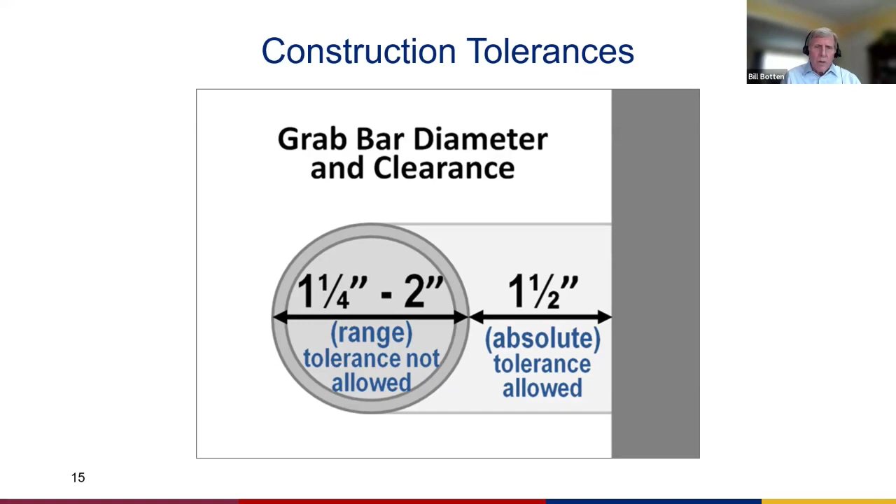And construction tolerances can be different for different types of manufacturing processes or different types of materials being used. I'm going to move on to slide number 16. Slide number 16 shows where there's this absolute. Let me just say that in the revision of the 1991 standard into the 2010 standard, there was a really great effort to try to reduce wherever there was absolute dimensions and make them all ranges.

And the reason for that is it's so much easier to construct, right? If you have a range, remember when there was an absolute dimension to the center line of a toilet? Well, plumbers didn't know what type of wall surface was going to be used, so it was always so hard. Now even that's a range, 16 to 18 from the sidewall.

What I'm showing you here on slide 16 is a construction tolerance slide continued, using the transfer shower. The transfer shower is an absolute 36 by 36, measured up from the floor about center line in both directions. So the back wall and the control wall both would be 36 inches.

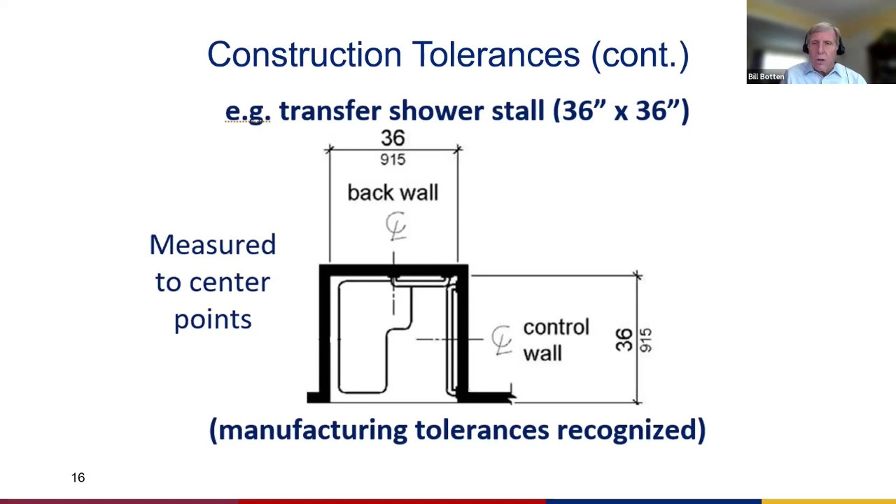Now, since those are absolute dimensions, not a range, manufacturing tolerances could be recognized. Some of those tolerances might include, like at the bottom of the shower, maybe it's a pan that rotates in or curves in on all four corners instead of being an abrupt corner all the way to the floor surface. So those manufacturing tolerances are permitted where absolutes are prescribed in the standard.

The next issue we're going to go to is, where don't you see a bottle filler anymore, or some type of water cooler in lieu of drinking fountains? I just want to state that neither of those, bottle fillers or this water cooler I'm showing here on slide 17, can be used in lieu of drinking fountains.

Once you start to provide drinking fountains, you have to provide two. Remember, the scoping is for the accessible unit for persons that are seated, and then one for standees. I'll show you a little bit more of that in upcoming slides, but once you've put in one drinking fountain, it requires two.

I think the thing I see most often is, like I'm showing you here, where a bottle filler is put at the back end of an accessible, seated fountain, for somebody using a mobility device to come up to and drink from the seated level, or for children.

With this idea where the bottle filler is at the back, remember that you cannot have an operable part beyond the knee and toe space provided. So 25 inches is the max it can be away from the front edge. I like to think of where my belly hits the front edge of that drinking fountain, to where I've got to try to fill that bottle, can't be greater than 25 inches, because no operable part can be beyond my toes greater than 25 inches.

So make sure you're not providing just a lowered unit and a bottle filler like the one I'm showing here. Remember, there's always got to be two in the same area, serving the same populations. It could be on the same floor, or in the same outdoor area. They don't necessarily have to be connected. It doesn't have to be one unit with a high and a low. It could be separate units, but they have to be in the same area, serving the same population of people.

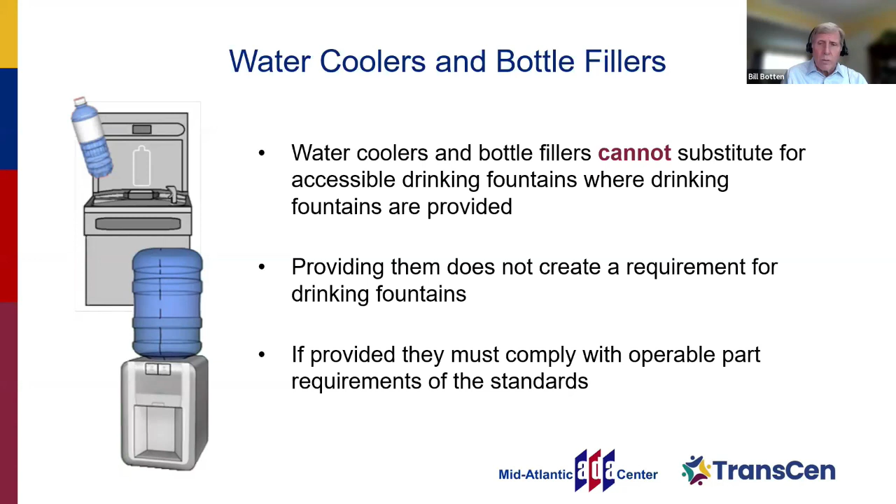So would a clear floor space. It could be parallel, but a clear floor space would be required, and the operable parts would need to be looked at. I'm moving a little further and going into drinking fountains as protruding objects on slide 18.

It's got two different graphics taken from guides right off the Access Board's website. It's showing an individual using a cane for wayfinding, tracking the wall, and coming across to where there's a drinking fountain in an alcove, but it still protrudes the maximum that it can, 4 inches.

So when we think of that projection coming off, a lot of times the lower drinking fountain, that projection cannot be into a circulation path greater than 4 inches, unless it's below 27 inches. But that drinking fountain needs to be mounted right at 27 minimum for wheelchair access, knee and toe clearance. So you really need to be right on with that.

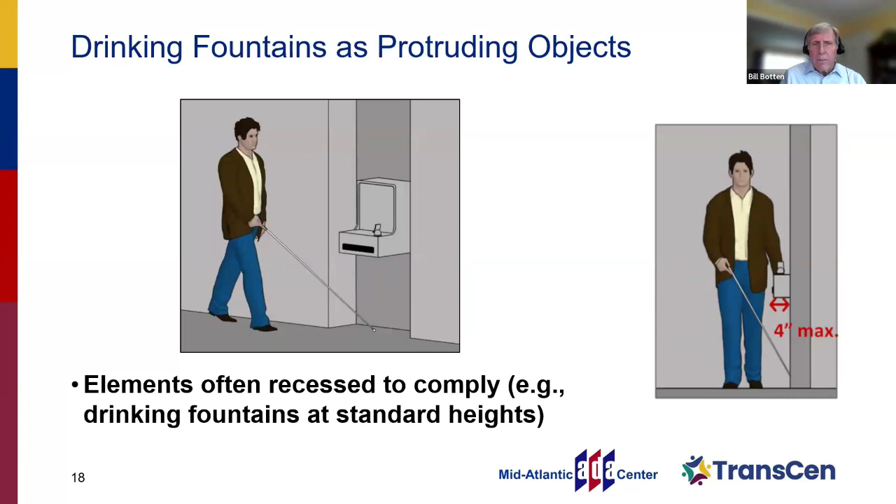I think the best way might be to put them in an alcove, or to make sure that they're not within the circulation path, which is always what's required. No matter what you have in this alcove, it still cannot protrude greater than 4 inches into a circulation path. And the wheelchair accessible unit has a 27-inch high absolute, and can enclose on one side of the high units.

So that could be the alcove created by that lowered unit. I'm showing that in the lower graphic here on slide 19, where the common direction of travel would be to stay to your right, so you're tracking the hallway along the right-hand side. The first object you come to is at 27 inches. Protruding objects in chapter 3 permit an object to be at 27 inches and still be cane detectable, but it's an absolute.

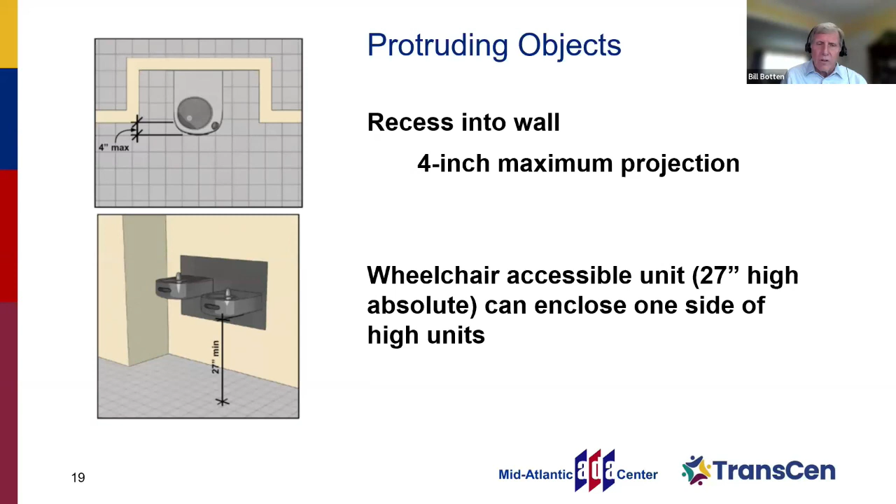I'm showing myself in slide 20 on the far right, at a recreation facility that uses a low unit, a high unit, and a bottle filler all in one. The clear floor space is being shown outside and away from that high unit.

Nancy, you want to stop me right here for a second? I do. We had a question that's perfect right here, I think.

The question is about drinking fountains located in an alcove. If it's located in an alcove and wouldn't be considered a protruding object, does that mean the knee clearance could be higher than 27 inches? It could exceed that 27 inches. I believe the standard does require that as an absolute, but I'll have to come back to you on that, or we can look it up as we go. 27 inches would be the lowest possible height for knee and toe clearance, but I believe you might be able to have it higher than that in an alcove. I actually sit a little higher than 27 at my knees and appreciate that additional height. We'll talk a bit more about that with dining and work surfaces. But I need to go look at the actual standard, or maybe you can, Nancy, and make sure that's not an absolute there in that chapter. I'll do that. Sounds great, I'll move forward.

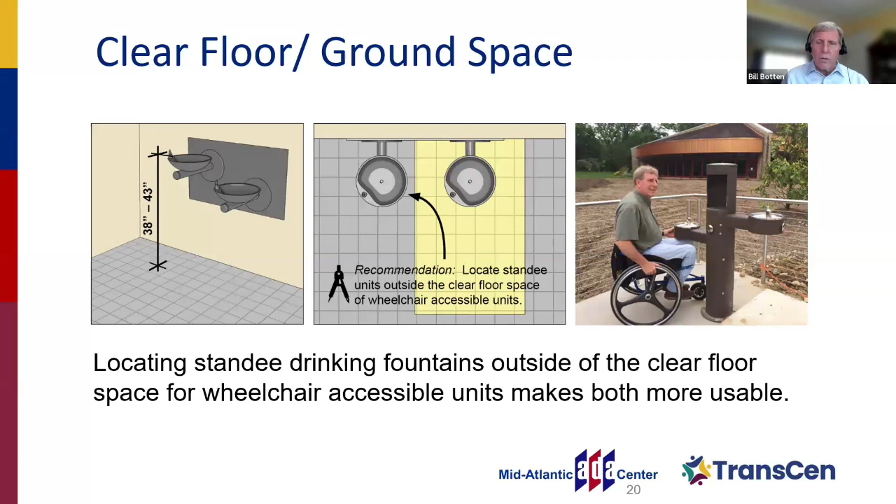I've also seen in recreation facilities where when you have this unit that has not only a high and low unit, but also a bottle filler, sometimes they have a dog bowl at the very bottom. Make sure the operable parts for that dog bowl are available within the reach ranges, no lower than 15 inches, and that it's not placed in the clear floor space for the mobility accessible lower drinking fountain.

So I just wanted to throw this in because when we talk about things that are mixed up or misused, we're really talking about an individual's independence. These minimum requirements are there to try to increase persons with disabilities' independence, their ability to do things on their own, not have to ask for help, in a safe manner. There's nothing more important than when developing an area or facility designed for children's use, that you use the dimensions for water closets, drinking fountains, grab bars, play tables and things like that, which honestly make it more independently usable for this younger population.

So I wanted to show that there is this opportunity, if it is for children, for a parallel approach to the drinking fountain with a spout at 30 inches maximum above the finished floor, and that spout 3.5 inches maximum from the front edge of the unit, including any bumpers, which makes it more independent for somebody sitting a lot lower trying to get to this in a parallel approach.

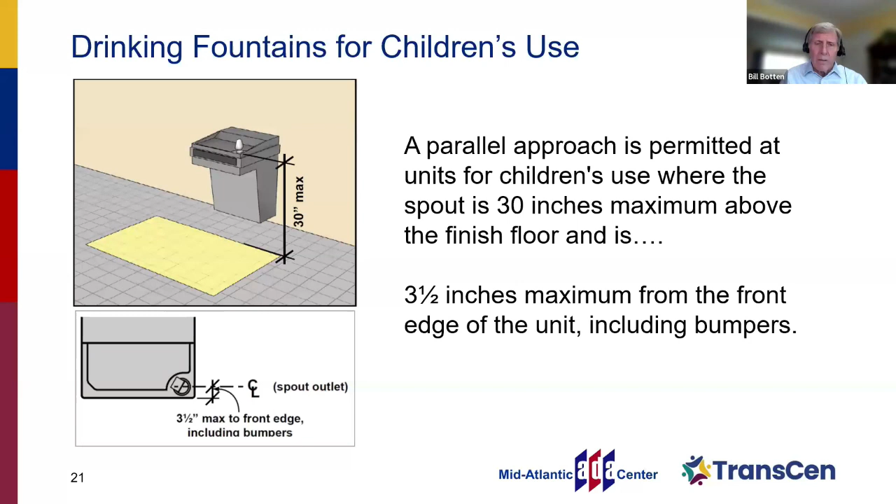I oftentimes think too - well, I have to sit parallel at a lot of different sinks, and I love the sinks that have the pull-down or gooseneck feature where you can bring it to yourself, because I can really get to both hands very well if I have that opportunity. In this one here, sometimes it can be very challenging to lean that far off to the side to get to a drinking fountain. So sometimes cups or a bottle filler make it more independently usable for some.

I looked in the standards and found this interesting: for knee clearance in the text, it's not really expressed as a minimum or a maximum. It's expressed as the space that can be considered knee clearance, between 9 and 27 inches.

The illustration shows the 27 inches as a minimum for knee clearance. That brings you back to 306, doesn't it? That's exactly what I'm looking at. Yeah, 306, and that's the way it says it in text: space under an element between 9 inches and 27 inches above the finished floor or ground shall be considered knee clearance.

So I think that suggests, and then the image sort of supports the idea, that it can be more, depending probably on the limitations of the top. For example, a drinking fountain with the spout location, or if it's another type of surface that requires knee clearance, there's going to be some sort of counter surface or something. So I think that's kind of interesting the way that's worded.

And if you'd like, before we move on, we did have a question I'm not sure you can answer, about the tolerances in the example of the transfer shower. Do you have any notion of how much tolerance is permissible?

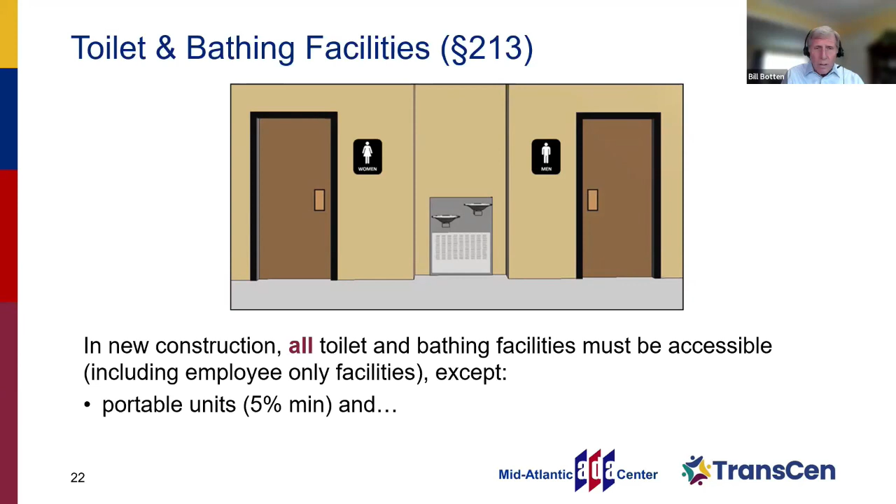We're going to go into a little bit more of that. And remember, that unisex toilet room or family room, whatever you want to call it, cannot substitute for access in provided multi-user toilet rooms. So if you're providing multi-user toilet rooms in new construction, it doesn't limit your obligation for accessibility in those just because you provide an accessible family restroom.

There is this idea, though, that if it's in an alteration and you can't make those existing toilet rooms accessible, you could do a unisex or family restroom, and that would be okay. But in new construction, no—that unisex restroom cannot substitute for access into multi-user rooms.

And that was an issue that we heard of regularly, as well as this clustered single toilet rooms exception. Remember, that is only for clustered toilet rooms and not clustered bathing rooms. That's a really big one.

If you provided individual bathing rooms, maybe with a transfer shower or shower, toilet, and sink, and there were multiple ones in the same location, it would require 100% of those to be accessible. Whereas if it was just a toilet room with a toilet and sink, meeting the requirements for toilet rooms, it would be 50% of those clustered in one location that serve the same users. So the idea here is it's serving the same population of people, but it's all in one location.

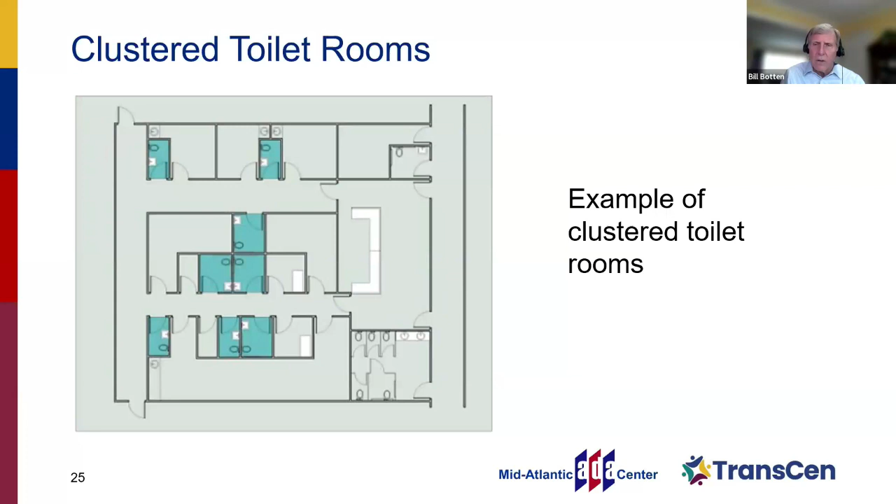The single toilet room cluster exception permits that only 50% of those would need to be accessible. The other exception under 213 is portable toilet and bathing. Here, if you have portable bathing and portable toilets, it's 5% of the toilet or bathing units at each cluster, where you're clustering these together, no less than one.

In slide number 26, I'm showing a graphic where it shows a ramp up to the clear floor space. Do not put these in the grass. Don't put them up on the curb if they're the accessible one. Try to provide more than the 5% because everybody wants to use these, right?

These are the larger ones. If you're going in with a kid, you're going in with a spouse that needs help, you're going in with somebody that's got a service animal or a mobility device, everybody wants the accessible one. I suggest you provide additional above this minimum requirement to facilitate greater access and independence by everybody.

It's showing it ramped up here, but remember at the door surface it would need to have a clear floor space and that door maneuvering clearance. You're seeing that the door maneuvering clearance is provided with that offset on the pull side.

Make sure that the portable toilets you're providing are single toilet rooms, right? They'd have to have the 5-foot turning circle in there. You need to make sure that the grab bars are in the right position, that the center line of the water closet is provided, and that your toilet paper dispensers and grab bars are all in the right locations.

Now, I've seen many where you don't have the clear floor space for the mobility device to sit exactly right next to the toilet or water closet, and some of those honestly make it a little bit easier for me. They're non-compliant in that, remember, you need to have that 30-inch clear floor space adjacent to the side of that water closet. But to me, that little bit of extra space is really helpful to get onto that before I get onto the toilet or back into my wheelchair. It can provide greater access, I think.

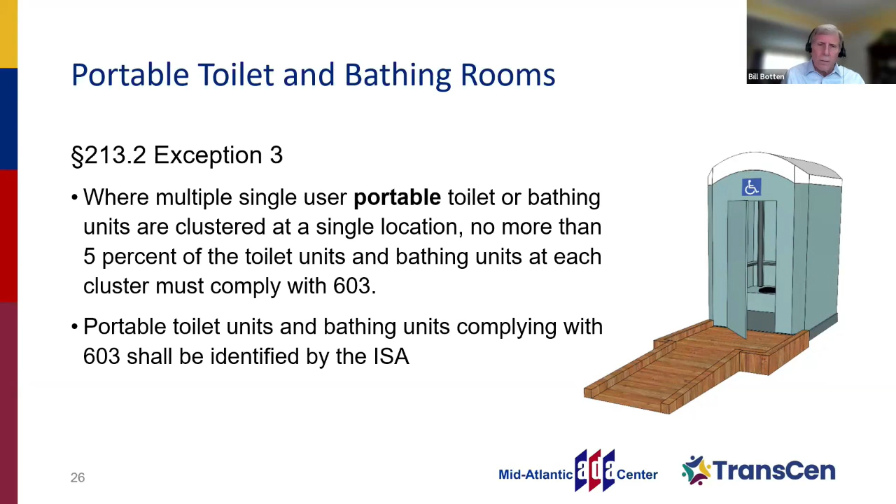Going forward with still toilet and bathing, I think one of the things we see more often now is this toilet compartment that has floor to ceiling partitions or doors, or just a little bit under the door. People want additional privacy, or sometimes we even see these now in a unisex multi-user toilet room where they have individual water closets in these larger stalls that are full partitions. Or we see individual toilet rooms that are along a corridor or hallway.

So that's the distinction I want you to make: toilet compartments are stalls that are in a multi-user room, whereas toilet rooms would be off of a corridor or hallway, with individual entrance doors off that common corridor instead of off a central room. So those two are treated very differently, right? One of the issues with stalls, and I'm on slide number 28, is that it requires toe clearance.

One thing people don't often remember is that once you're in the stall, the ability to maneuver depends on getting your toes underneath those partitions to increase the size of it. So toe clearance is required per Chapter 6.

On slide 28, I'm showing an elevation for an adult, an elevation for children, and a plan view showing the minimum 6-inch clearance around one side and the front. The children's elevation requires a minimum of 6 inches beyond the partition on the outside, at 12 inches minimum from the floor surface. The adult partition requires that same minimum 6 inches beyond the partition outside the stall, at a height of 9 inches minimum for toe clearance.

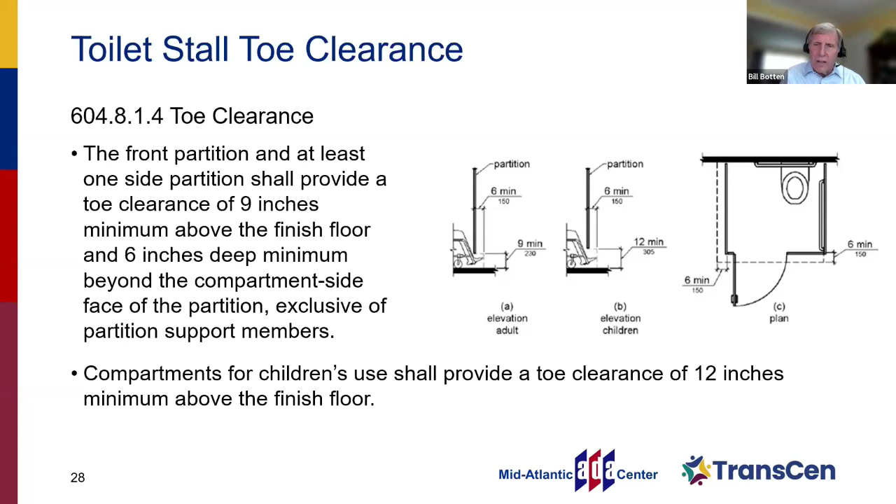So what happens then? There's an exception in 604.8.1.4 that says toe clearance at the front partition is not required in compartments that are greater in size. So we incorporate that toe space into the size of the compartment. Basically, if you can't provide that additional toe space along one side wall and one front wall, the size of the stall just gets larger.

Greater than 62 inches deep with a wall-hung water closet, or 65 inches deep with a floor mounted water closet. Why would it be bigger with a floor mounted one? Because you can't get your toes underneath it like a wall mounted one, reduced usability, reduced toe clearance underneath. So toe clearance at the side partition is not required in a compartment that's greater than 66 inches wide.

Nancy: We've had a question here related to the partition supports. How wide can a support be when it restricts toe space? That's a good one.

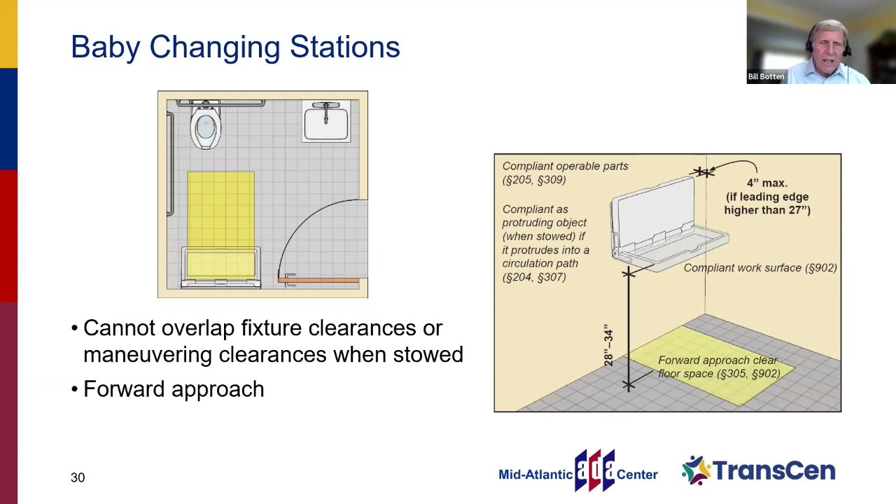I have not seen where building standards are trying to bring in this overhead lift yet, but the adult changing table is coming in the ANSI document, and will be coming forward in large assembly areas - this requirement to provide an opportunity for adults to have a changing table in certain occupancies.

And the idea here was that this surface - I've seen them both where they move up and down, and also where they are fixed at a transfer height between 16 and 18 inches. So I've seen them both ways. I think the electric or adjustable height might provide more independence and usability by a wider audience.

Remember, you're looking for clear floor space, operable parts if they do operate. This one had a lot of instructions on the wall about how to operate it. It also had a removable pad that could be taken on or off - quite a setup they had there at the airport. But in your model building code, the requirement for these in certain facilities, occupancies, and assembly areas will be looking to start to provide these adult changing stations or tables.

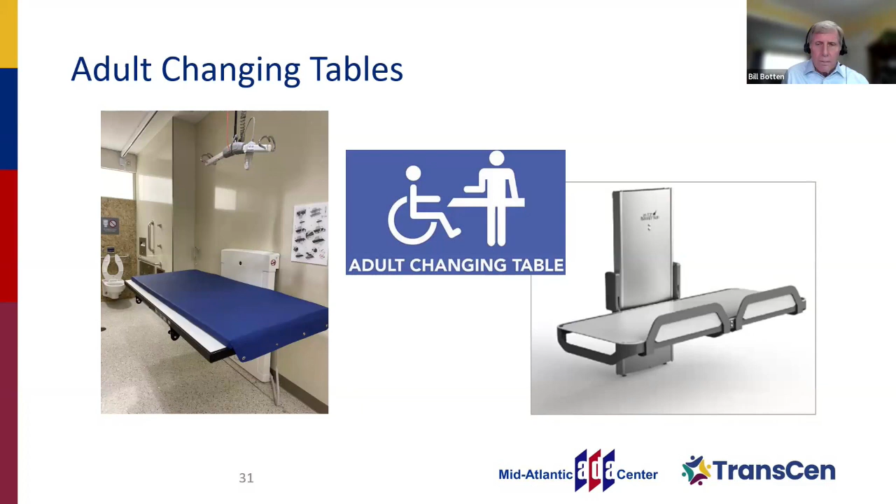Nancy's back - what do you say? 902 gets you knee and toe. Yes, it does - it gets you all the way to 17 inches toe clearance. So it does, yes. A baby changing table is definitely a work surface, right? It is. You're working on that.

Yep, so there it is. Compliant work surface at 902 would get you back to 306, which would get you full knee and toe clearance, which would be a minimum of 17 inches underneath the element.

So good catch, good question. Good questions. We got some stumpers with us today.

Transient lodging guest room scoping was one of the other issues we wanted to bring up today, and that guest room with mobility features. First, remember, it's your choice, but you've got to pick one. And oftentimes it might not be your choice, but it's going to be a transfer shower, an accessible tub, a roll-in shower, or the alternate roll-in shower.

And I have my bias. I'm a paraplegic, and I really prefer either the transfer or roll-in, or a tub with the permanent seat, not a removable bench. Too hard to transfer for me.

Remember that the idea on the scoping would be that they're dispersed among the many classes of guest rooms that are available to everybody else. So if it's two twins, a king, a beach view, a balcony, whatever we've got going on, we're still looking to make sure that individuals with disabilities have that same opportunity, whether it's the type of beds, the amount of amenities, or the type of room being provided.

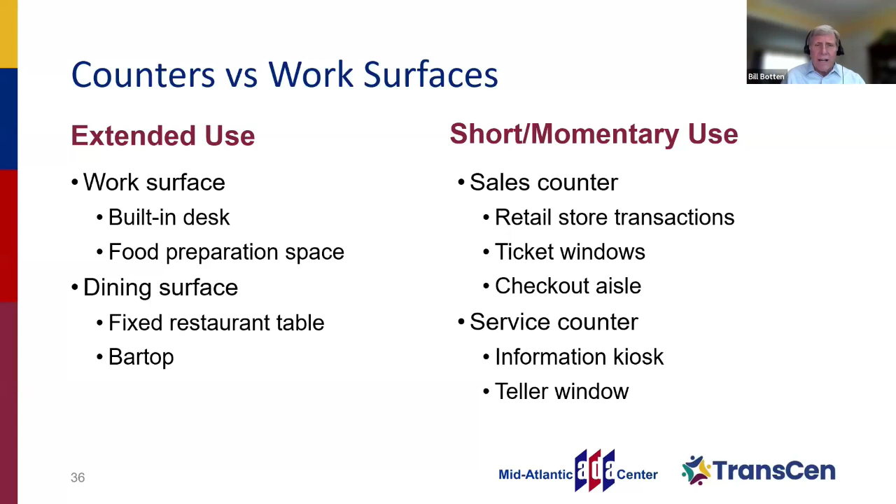And so we thought we'd clarify a little bit of it. Here we should have probably gone to this slide after we talked about baby changing stations, because that work surface height is 34 inches to the top of the surface, but does require full knee and toe space on any work surface or accessible dining surface.

For a service counter, it's your choice. You can provide either a parallel approach with a 36-inch high maximum counter height, or you can provide a forward approach with knee and toe space, again at 36 inches.

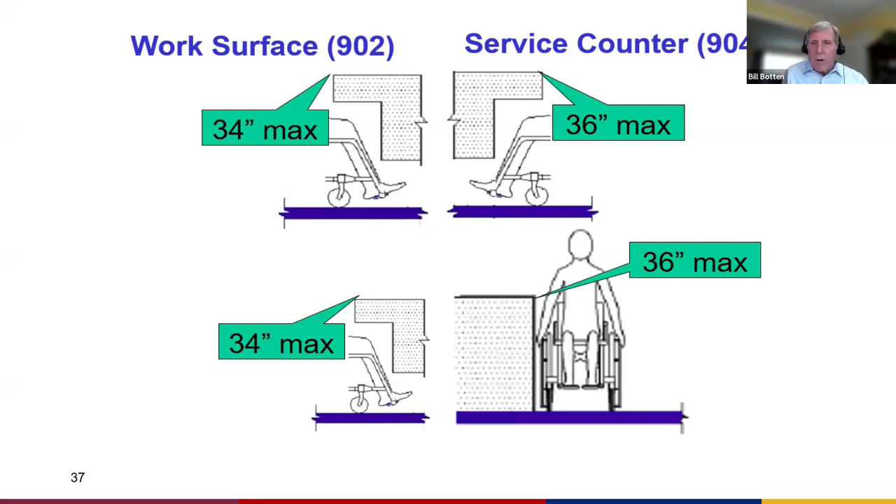So your work surface height max, your dining surface height max is both at 34, but your sales or service counter max is 36 inches from the finished floor, providing either a parallel or forward approach. Slide number 38 goes into that work surface.

Remember, under the Americans with Disabilities Act, the scoping applies to work surfaces for public use or common use. Okay, so we're thinking things like a library, a school, excluding that use by employees. That provision is found in the scoping requirement. So accommodation for employees with disabilities is required under the ADA under Title I, and so it'd be a job accommodation.

But we're talking about work surfaces maybe at the airport, maybe in a terminal, that are there for public or common use. We already talked about that the top of that work surface is 34 inches, and it does require knee and toe space. And so I have a slide that brings a little bit up that.

The scoping requirement in 226, Chapter 2, access to at least 5% of the surfaces. At least 5% applies to both standing and seated surfaces, and dispersion within the space or facility is required.

I want to highlight one thing, and I put the provision in here, and it says where dining surfaces are provided for the consumption of food or drink, at least 5% of the seating spaces and standing spaces at the dining surfaces shall comply with the 902 requirements. It doesn't say of each type. It just says 5%.

Now, that 'of each type' sometimes can be that clarification. Here we're saying standing and seated spaces, but we're saying that that is really the only typing we're talking about. We're not saying inside and outside spaces, though I would suggest that dispersion requirement would make it so that you facilitate access in as many of those areas that everyone else has that same opportunity.

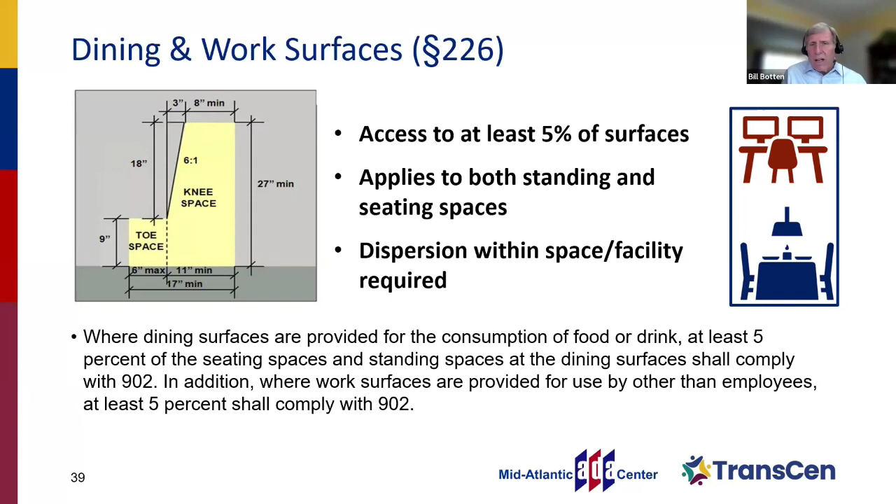In slide 39, I'm also showing a graphic on the upper left that shows that minimum knee and toe space. It's showing that at that 27 inches minimum, we have 8 inches of knee clearance. This is a graphic directly straight out of the U.S. Access Board's materials, and on the right-hand side, I'm showing you a graphic of just a dining surface and a work surface.

If you had all three of those counters, an order, a pickup, a drop-off counter, all three would need to be accessible. Remember, it's one of each type. Other types of sales service counters, display, exhibit counters, are covered only if they function as a sales and service counter. So you could have a display counter, but if it doesn't serve as a sales or service counter too, it doesn't need to meet these minimum requirements.

So the scoping is at least one of each type of counter, each type of function at the counter, and dispersion among the types of counters provided. I put a resource there, an animation that U.S. Access Board staff created on these sales and service counters, and it's a great one. I honestly think the best way to see provisions and understand them is to see how they impact usability, to see how somebody really uses things.

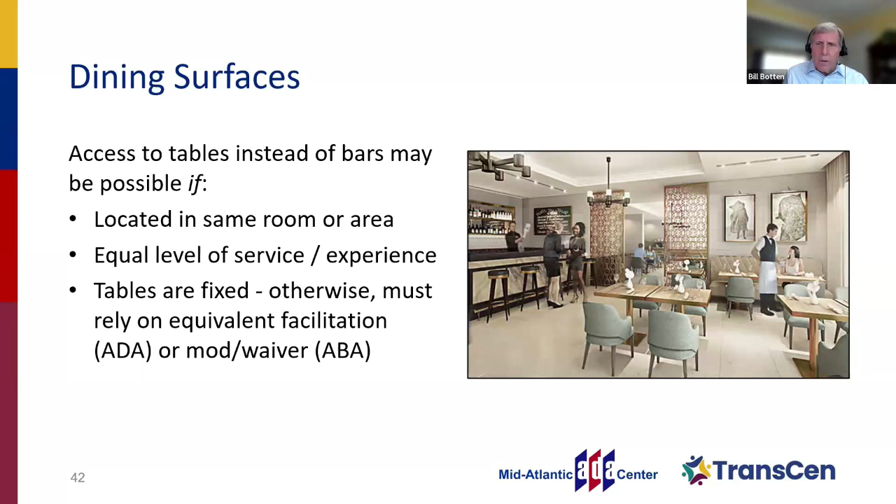They have what's called a modification and waiver, not equivalent facilitation. Remember, 5% of the seated spaces would be required to be accessible. In the graphic on slide 42, there are non-fixed tables and a bar counter. If the only fixed dining surface in this facility was the bar, that would need to provide an accessible dining surface. But if they had fixed dining tables in the same area, same level of service, same experience, located in the same room, you could get away without providing a lowered area at the bar.

Think about the location of where things are. These portable toilets are put on the hard surface—don't put them up in the grass. Make sure everybody has access to them. If there's a lip greater than a half inch to get in, you need to ramp it. And remember, there has to be a level landing at the door for maneuvering space, which is why I showed that earlier picture.

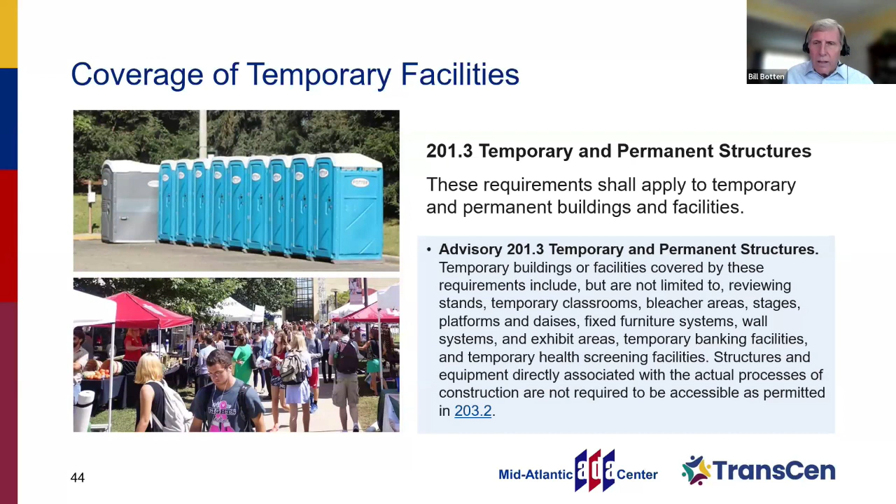Benches are one of those questions we get all the time—whether a bench out on the pier at the lake or a bench in your courtyard or atrium needs to comply with the requirements for dressing, fitting, and locker room benches. Often we say if there's not a specific requirement for the element, standard, facility, or space you're providing, you look to the standards for guidance. But this is a really different type of bench.

This bench is designed for somebody to roll around on and get dressed. Providing a dressing bench out in the built environment in other areas where it's not for dressing is typically not appropriate. I'd recommend that the requirements for the dressing, fitting, or locker room bench are not what you should look for when providing a bench in an atrium or along a trail, shared use path, or similar area.

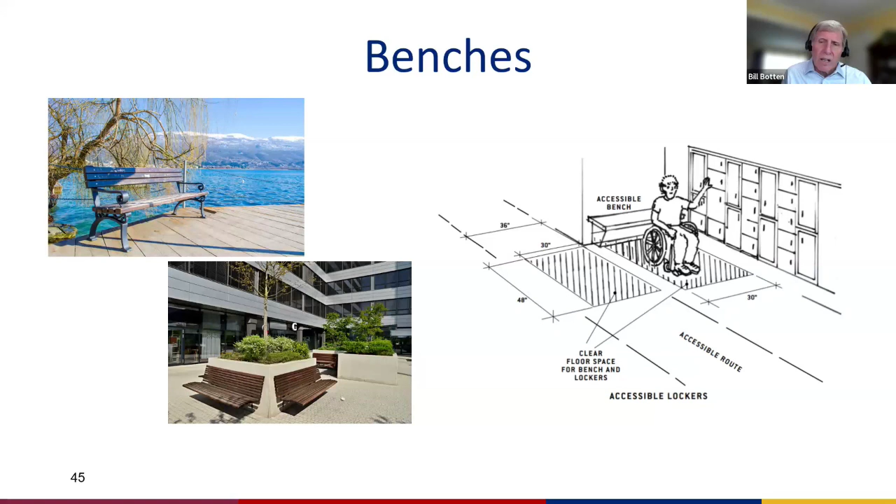Shopping or shipping lockers - I had this frustration recently where I couldn't reach the locker they put my stuff in, and I had to get staff to help. So I thought I'd throw this in and talk about how they would be required to be on an accessible route, that a percentage of them, at least one of each size type, would need to provide an operable part and be accessible. It's so important that the opportunity to get your materials sent to one of these places, or pick up, that they provide a level of access. So consider those when you're looking at any type of survey or facility inspection you're doing.

When you're doing handrails on ramps or stairs, there's not a minimum distance from the sidewall. These can be freestanding and be quite a ways away from things. There's not that thought that you're going to get trapped by going behind something.

But it does require extensions, and you see them highlighted here. I'm going to go into further detail, but they're 12 inches minimum long in the same direction of travel, required at the top and bottom. I can't tell you how many times I've seen where the landing starts too soon or too late, and you can't get this, or they try to wrap the handrail around the corner and don't put it in the same direction. It needs to be level and in the same direction.

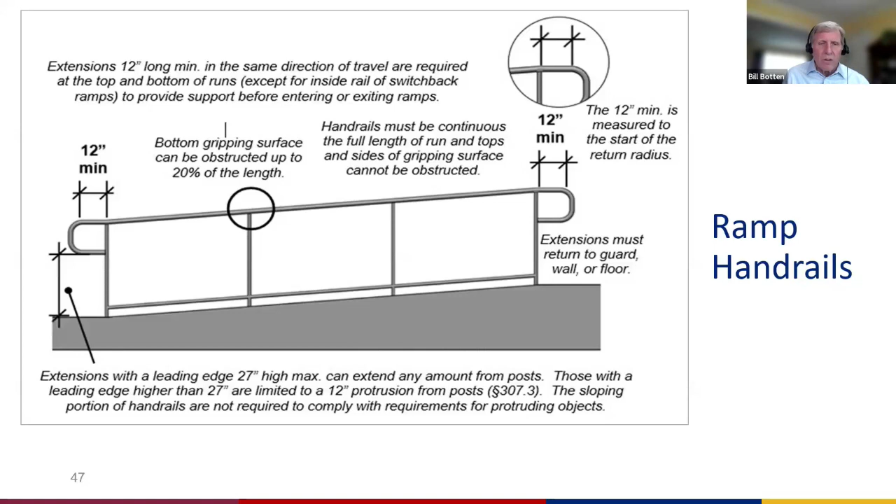Sloped bottom extensions: one tread depth minimum beyond the last riser nosing, in the same direction of the stair flight. And that can be kind of confusing, right? In stairs, you want to continue beyond one tread width in the same downward or upward slope, but at the top, you go horizontal.

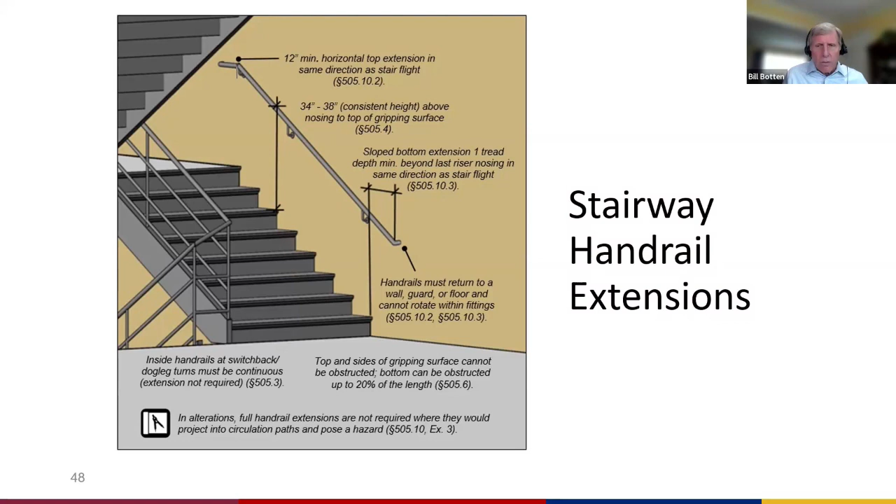That top handrail extension, again we already talked about, but it's 12 inches horizontally above the landing, beginning directly above the first riser nosing. Remember, measured to the start of that turn, 12 inches minimum, must be horizontal at the top.

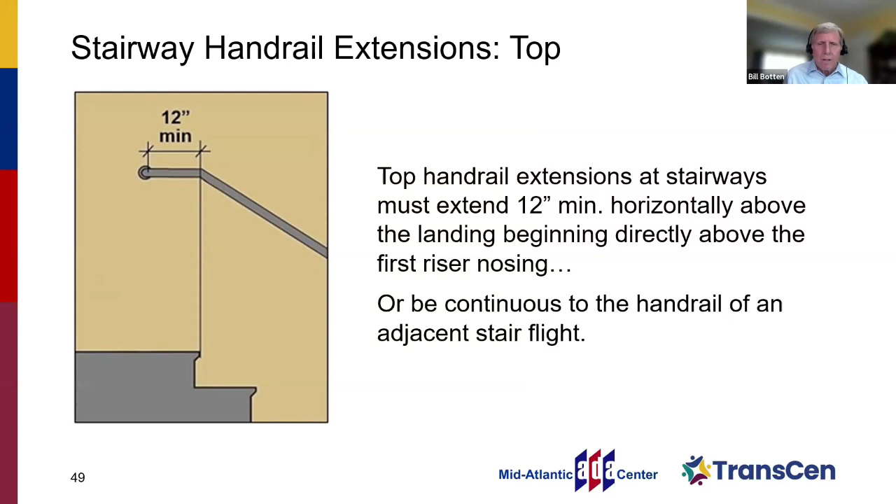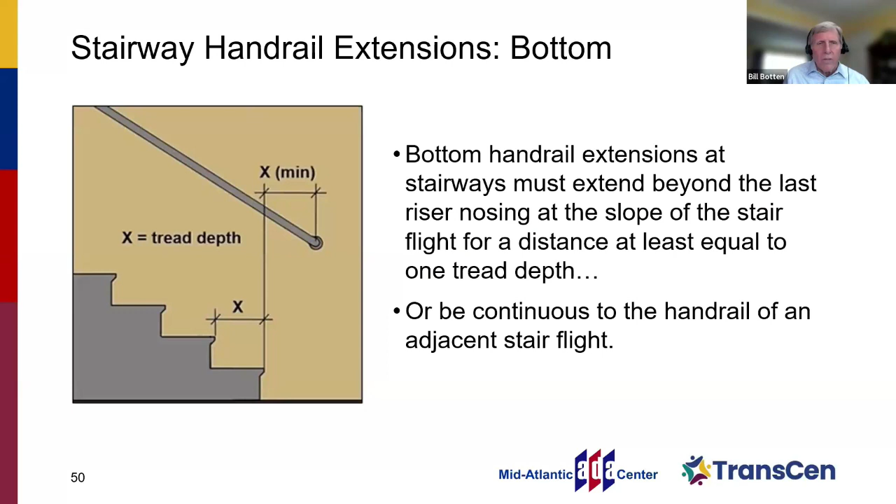Slide number 50 shows that bottom extension again in the same direction, 1 tread width minimum, okay, but it's beyond the last nosing in the slope of the stairway flight for a distance equal to 1 tread depth.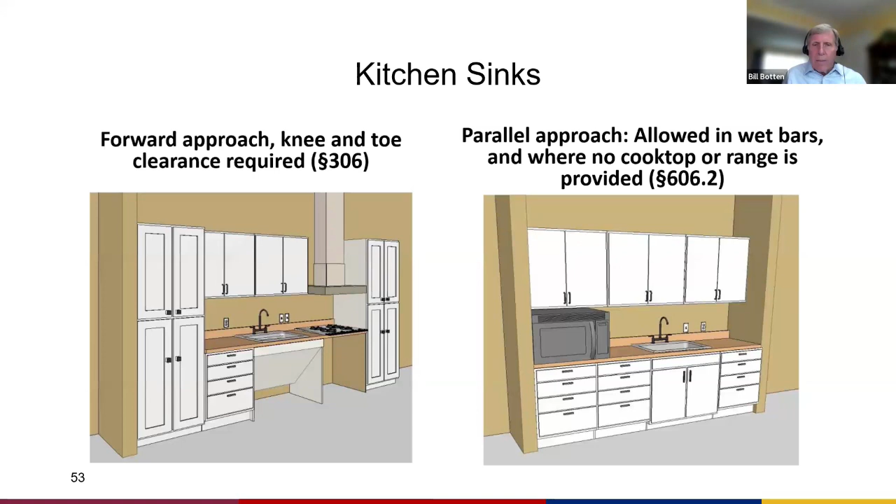So the question always comes up: when do I have to have knee and toe space underneath the sink in a kitchenette or a kitchen? Forward approach is required at the knee and toe, but if you have a wet bar or where no cooktop or conventional range is provided, in 606.2, it says that you can provide a parallel approach. Now, some state codes I've seen say that if you're providing a microwave, you still have to provide that knee and toe space. But currently, the federal standard says if there's a wet bar or where there's no cooktop or conventional range, you can provide a parallel approach at a kitchenette sink.

Each separate movie theater would provide this opportunity. There's an exception where no audio amplification is provided. Courtrooms don't get that exception; all courtrooms would have to provide assistive listening. It's not triggered by the occupancy load or fixed seating. Remember, it's only triggered if you're using a microphone, and signs indicating the availability of these need to be provided when they are. There's lots of ways to provide this, and they're becoming more and more independently usable through broadcast or Wi-Fi, infrared, FM radio, or an induction loop are 3 of the common ways that these are provided.

On slide number 56, we talk about the receivers. In the late 90s, I was working for a large assembly seating facility management organization, and at that time the old standard said 4% of the seats in your seating area was the trigger or scoping requirement for how many receivers. We were trying to, for a 20,000 seat facility, we had 800 of these receivers. We would barely check out 2 or 3 at a time. The 2010 ADA standards reduced that, the minimum number of receivers required per assembly based on that seating.

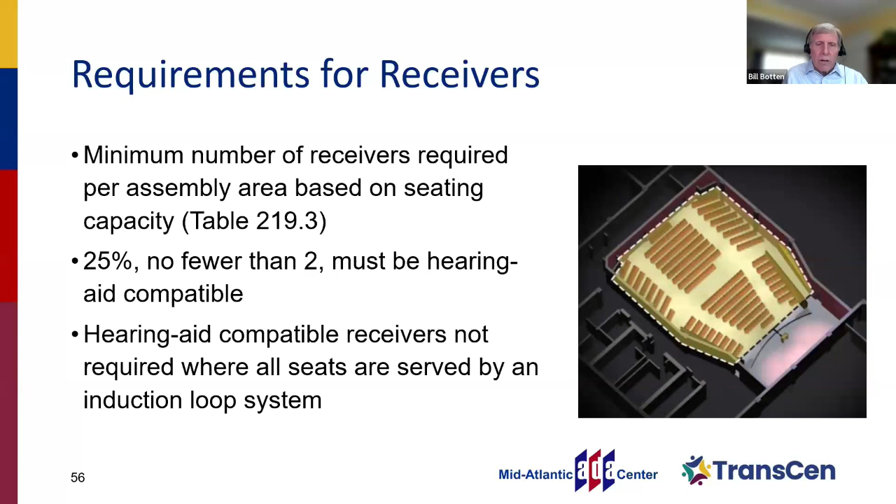Moving on to slide number 59, it shows a graphic of two vehicles parked in a parking area, and each of them has an opportunity to charge their vehicle, one in a head-on position and one in a rear-facing position.

Requirements for operable parts: clear floor or ground space at that element, connected to the accessible route. The requirements for Section 508, whether audible or visual, those opportunities typically only apply to the federal government at this time.

I think most manufacturers will create these so that they don't have to create two versions, providing accessible options on the display screen, the input controls, keys and cards, and how you use them, along with the automatic fare or fare machine requirements.

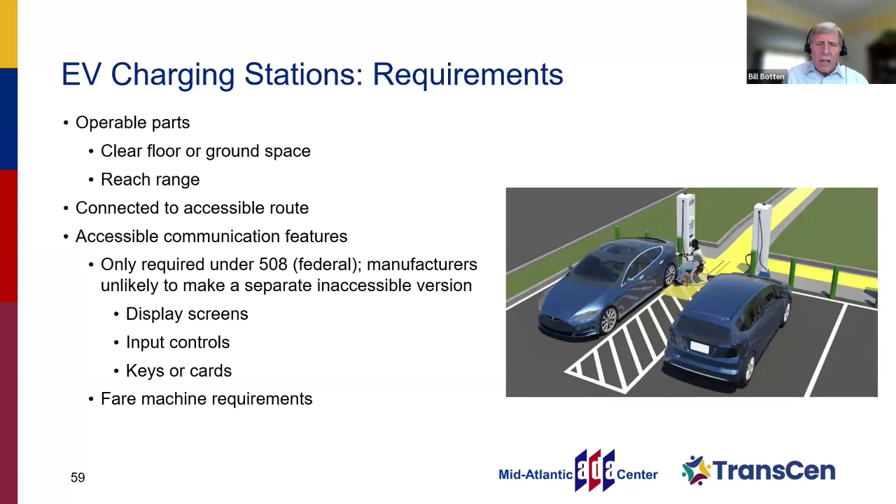This should be looked at. Don't allow these to continue being put in where you can't reach them, where they're outside your reach range. I'm showing you a picture of myself on slide number 60, where I can't even reach the element.

The real challenge with a lot of these vehicles is we don't know where they're charging. Some charge right in the front, some on the right quarter panel, some in the rear quarter panel. That's what makes it challenging—people need to be able to back in or head in and get to these, using that accessible route access aisle to reach the unit itself.

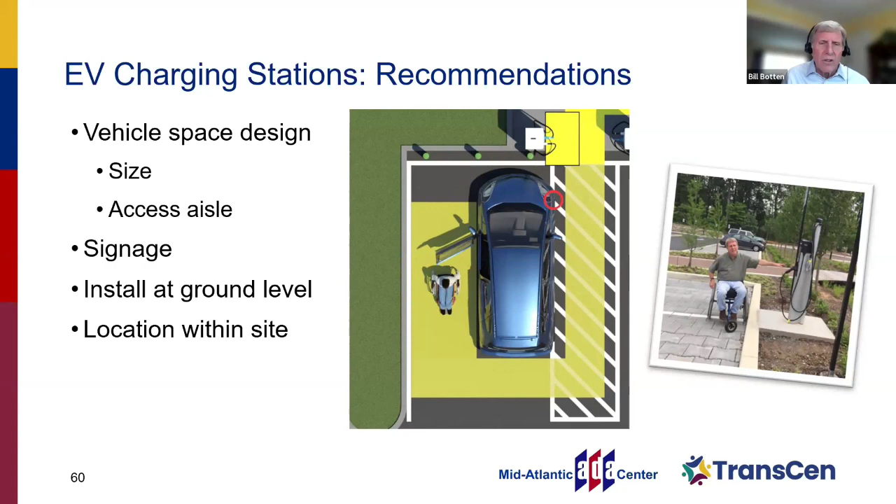So make sure the vehicle space has the right size, an access aisle, and some signage. The guidance document doesn't provide any scoping for how many are needed—it just talks about what space is needed and how to install at ground level at the site. On slide number 61, I moved to what I call facility types.

I think there's always a lot of confusion on whether you're creating an accessible route connecting elements on a site, even within a play area or recreation facility. If it's a pedestrian access route, is it a sidewalk, a crosswalk, a shared use path for hikers and bikers, or just a pedestrian trail? Understanding the facility type you're creating gets you to the requirements for that route—so know what you're creating before you apply route requirements to a specific facility.

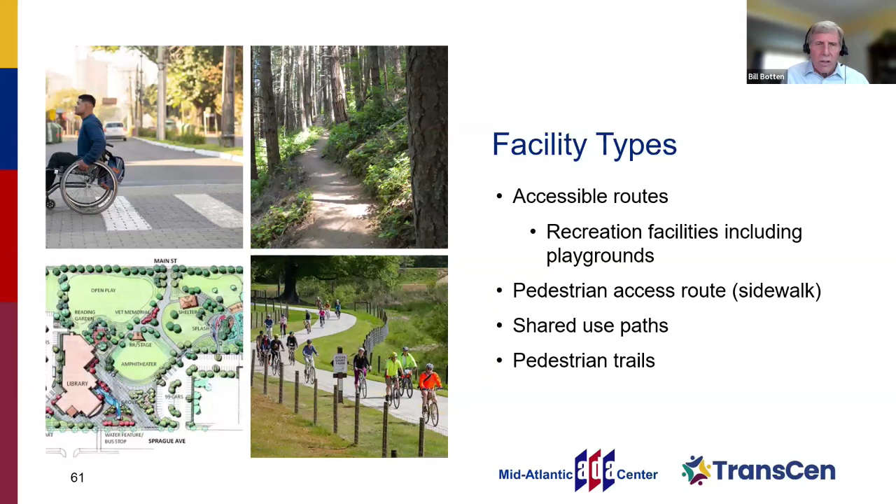Anytime you do a gate or barrier, the Americans with Disabilities Act requires a minimum of 32 inches. Along pedestrian routes or trails and outdoor recreation access routes, a minimum of 36 inches must always be maintained. If the gate's unlocked for some, it needs to be unlocked for all. Accessible gate hardware needs to be available, since the opportunity to participate is oftentimes limited by gates or barriers.

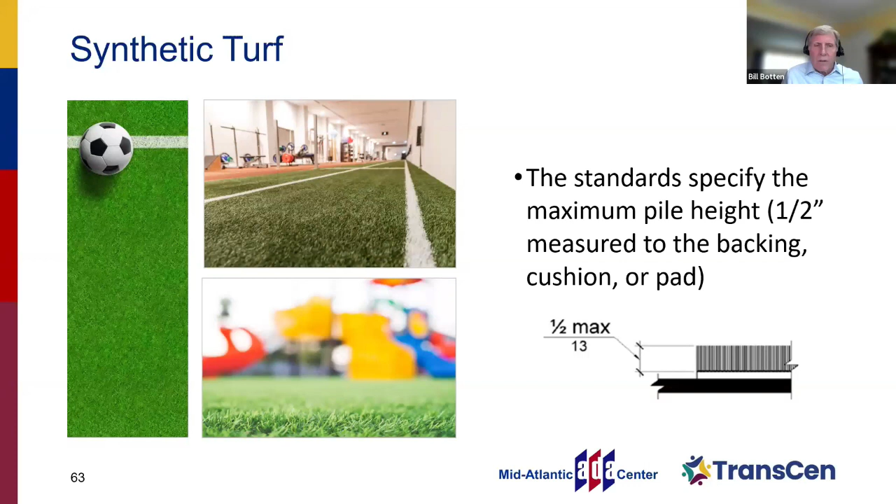I wanted to briefly tell you about synthetic turfs—we used to call them AstroTurf when it first came out. Anytime these are used as part of an accessible route, there's a carpet requirement. So in a play area, or if you're connecting to a locker room, maybe a service animal relief area that's part of an accessible route, and using synthetic turf, remember there's a half-inch pile requirement for carpets. That's my slide number 63.

Slide number 64, I just wanted to leave you with some resources. We're coming close to the end of this one, with some technical assistance guides and animations. I'm a person that needs to print, and unless you're going to print that 300-page document yourself, there are ADA and Architectural Barriers Act field manuals available.

There's even public rights-of-way reference field manuals now available for purchase. If you're a person who needs a standard in front of you to look things up, instead of your cell phone—especially if you're not in a service area or out in the field—these are a great opportunity to keep with you. I travel with one so that when I'm at a transient lodging hotel and they tell me something is a requirement for the ADA, I can show them flat out it's not.

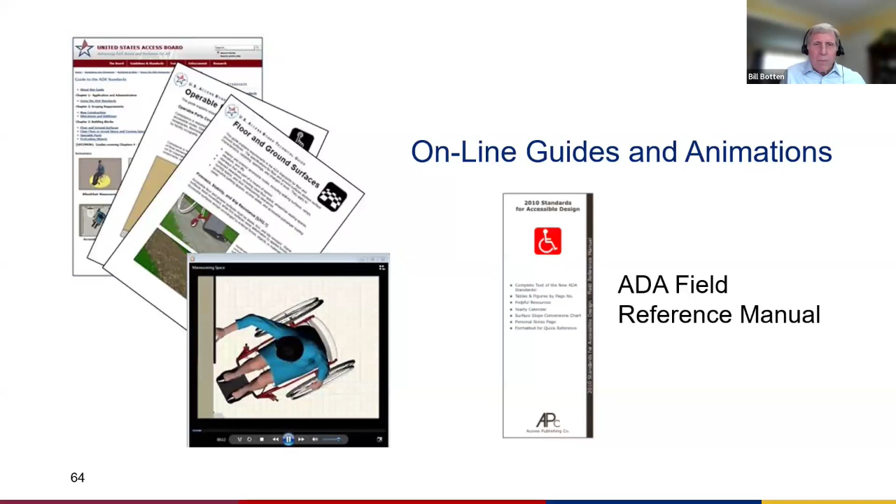So I like to use it all the time. I like to keep one in my vehicle and my briefcase at all times.

So, Nancy, you got a couple more for me before we end today? We have several more, and I think we cannot get to all of them, so folks may have to give us a call. But I'm going to try to go back to where I stopped taking questions, because I wanted to make sure you were able to get through all of your terrific content. We do have a couple of good clarifying questions. You can move along to the next slide if you like.

So one question we had was about confusion regarding benches, and the distinction between benches out in the park or on the boardwalk versus a changing room or locker room bench. Could you clarify if those outdoor benches are actually covered by the ADA, or by the standards?

If they're fixed, I would say they are covered. There's not specific technical or scoping requirements for them in the ADA, so there's not a specific transfer height, a requirement for backs or armrests, or how many you provide. There's been some change in supplements to the Architectural Barriers Act, with a new standard for public rights of way addressing benches there. But typically, persons using a mobility device aren't going to be transferring to a sitting bench—they're already sitting in a mobility device. So the transfer heights or transfer supports, I don't know how important those really are; I think those are more usable by persons who are still ambulatory. So there's not a transfer height requirement, no requirement for armrests, no requirement for a back for a public sitting bench.